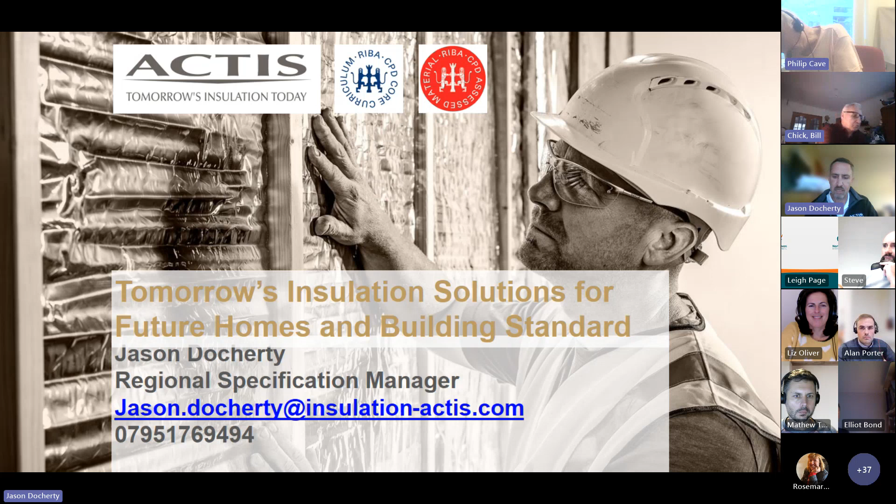If you don't know much about ACTIS, we're a multi-foil insulation manufacturer and we've been innovating new insulation solutions for over 40 years now. Multi-foils are quite massive in Europe, so the UK market is finally getting with the program, so to speak. We are a French-based company, so our current production sites, which we have four, are in the south of France. We are currently building a new production site as we speak. And hopefully the aim is by the end of 2025 that all of our production sites will be using totally renewable energy resources such as biomass and solar to produce our products.

So if you've got any customers that have green credentials, we have some really favourable data on this. We actually have zero waste production processes, and all of our products are 100% recyclable, and that's at the end of the building life or during production also. So if we have any offcuts of some of our products, we can chop it all back up and put it through the manufacturing process. We're really proud to announce that we've just received Cradle to Cradle certified products of our honeycomb insulation material, which I'll cover a bit later in the presentation.

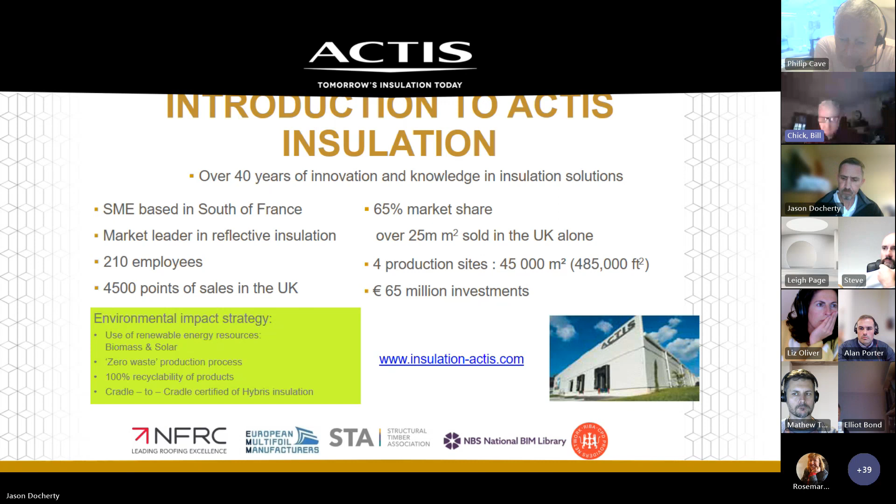We do try and give a full cradle to grave experience when you are specifying ACTIS, so we offer on-site guidance and support as well, and we have many tools on our website. If you haven't been onto our website, it might be worth having a look. We've also got our own YouTube channel where we present all of our installation videos. You just Google ACTIS insulation and all of our videos will pop up. We also have a simulator tool on our website where you can get an idea of how much material you'll need to gain the U-values that you require.

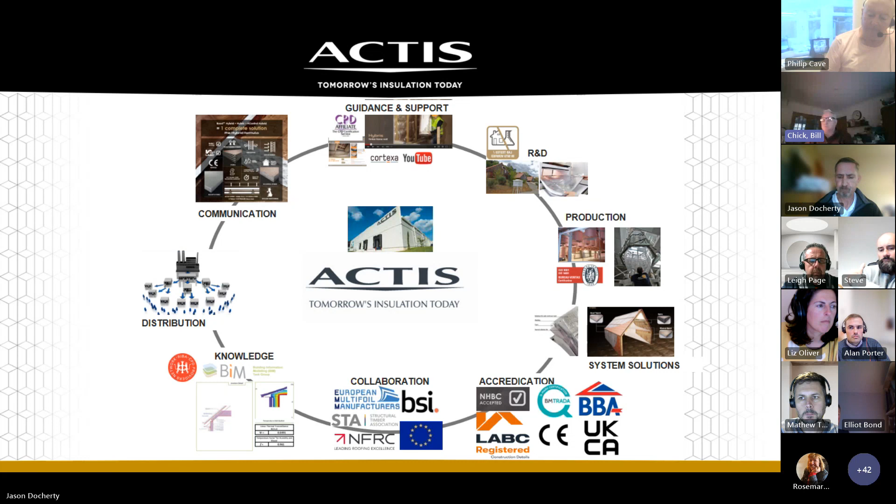All of our production processes are ISO accredited as well, so they're tested very rigorously, making sure that the products do what they say they should do. We offer a full tried and tested system from external to internal within a building's thermal envelope, so again, fully tested and accredited systems. We have independent accreditation and there's no issues with certification within the UK market. With regards to distribution, we do not sell our products to the end users directly. All of our products are sold via the builders merchants nationally and other distribution networks within the UK. And we're currently on a two-week lead time, so there's no issues with materials on the ground. So that's a little bit about ACTIS.

So moving into the main body of the presentation today with regards to Future Homes and Building Standards. Obviously the goal is to be building to net zero by 2050, which is going to be extremely hard to achieve if we continue with our previous building practices. So some of the objectives: what we need to do now is future-proof new homes to an extremely high standard. This not only means increasing the levels of insulation materials, but we need to think about the whole thermal envelope. We need to think about thermal bridging, especially at junctions of dwellings, and looking at airtightness of dwellings as well comes as a very important factor.

With regards to retrofit existing homes, we needed to do this to an extremely good standard. Now, you may have heard of the Zero Carbon Hub that has done many reports looking at a performance gap, especially with regards to retrofit. And they found that on many occasions there was up to 80% difference between the expected U values that were designed in a studio on CAD, etc., and what was actually found in a real life scenario. And this is a massive, massive issue for the industry as a whole.

And we've been talking about this for many years. Obviously, we need to reduce our carbon emissions, phase out fossil fuels and then decarbonise the electricity grid. If we continue to build with weak fabric solutions, our current capacity to provide electricity and a grid, etc., would not be able to support the current building we have going on within the UK. Some other things we now need to take into consideration are things like electric vehicles, especially with regards to new build or change of use, etc.

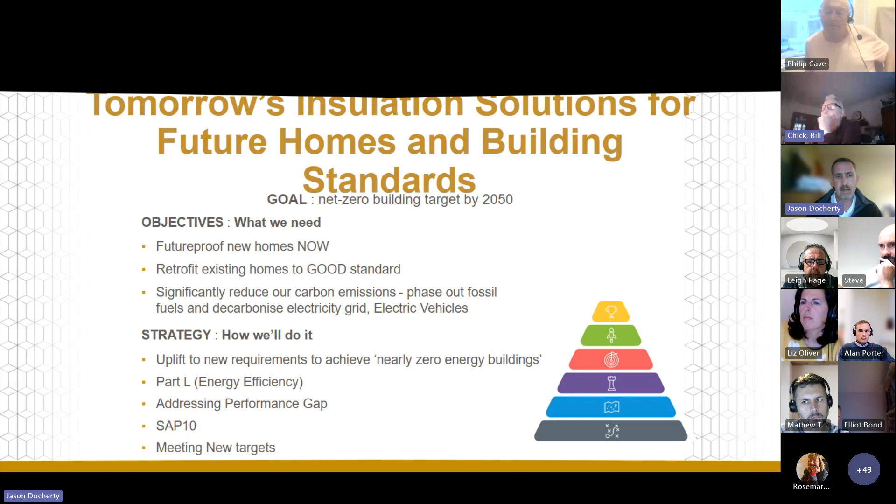Some of the strategies on how we'll achieve this. So obviously there's been an uplift to new requirements to achieve nearly zero energy buildings. We'll be looking at some of the Part L changes with regards to energy efficiency. We'll have a look at the ways we can address the performance gap with tried and tested systems. We'll be touching on some of the issues and new developments within SAP 10 and looking at some solutions on how we can meet these new targets.

So some of these new targets you may have seen on your SAP results. There's a new primary energy target for all buildings. There's a target CO2 emission rate for all buildings, also known as TER. There's also a target fabric energy efficiency rate for all dwellings, or TFEE.

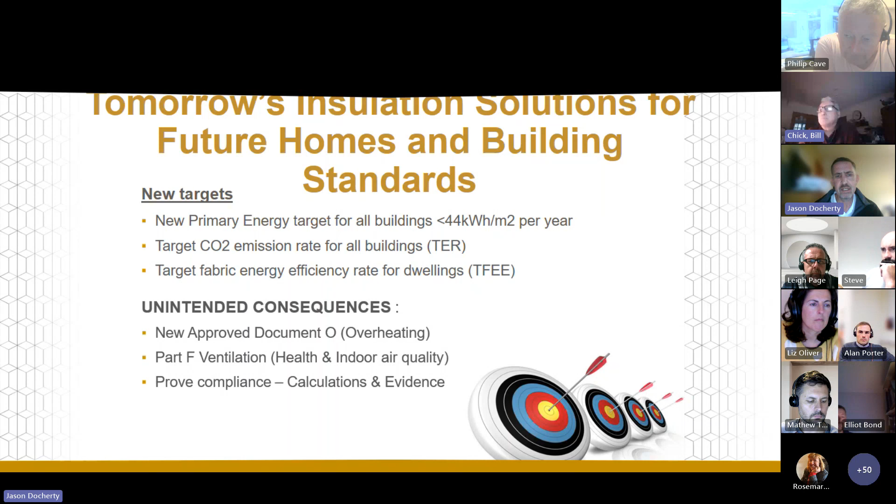However, if we're going to be insulating more, making buildings much more airtight, etc., there are some unintended consequences. So we'll be touching on the new Approved Document O with regards to overheating, and looking at Part F with regards to ventilation, health and indoor air quality. Some of the products that we specify can really affect this, and the VOCs they emit are vitally important. All ACTIS products are A+ rated, so very, very low emissions. We'll also be looking at some ways we can improve compliance and some of the calculations and evidence that are now required in the industry.

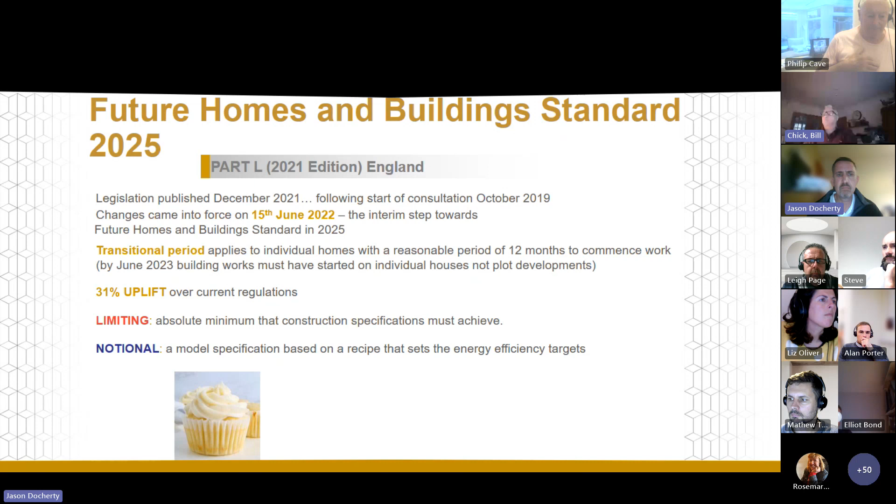So as we know, from last June, there was a 31% uplift over current Part L regulations. Now, when thinking about a new build, we need to think about this as a recipe. So we can work to two different kinds of figures. If we work to limiting figures, in a cake world or a recipe world, this would be a bog standard cupcake. So this is the absolute minimum that the construction specifications must achieve. However, we can then work towards notional figures, which is a model specification based on a recipe that sets the energy efficiency targets for that dwelling. So in a cupcake world, we could add sprinkles or chocolate icing.

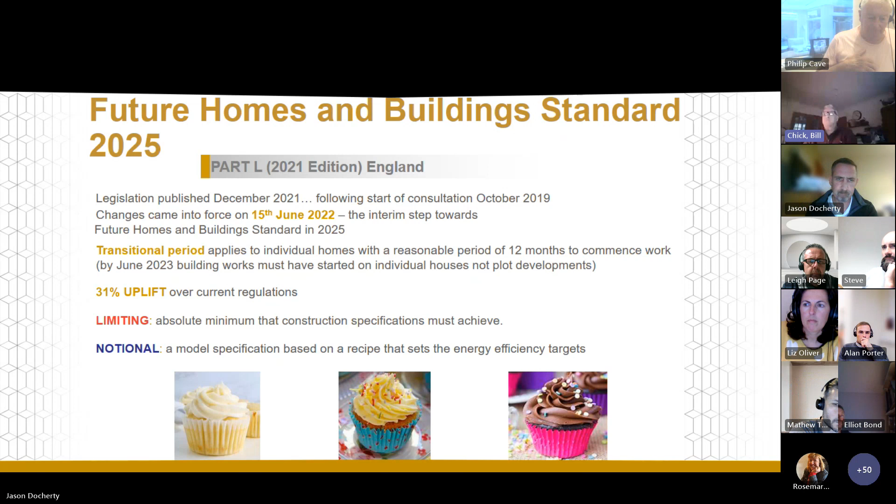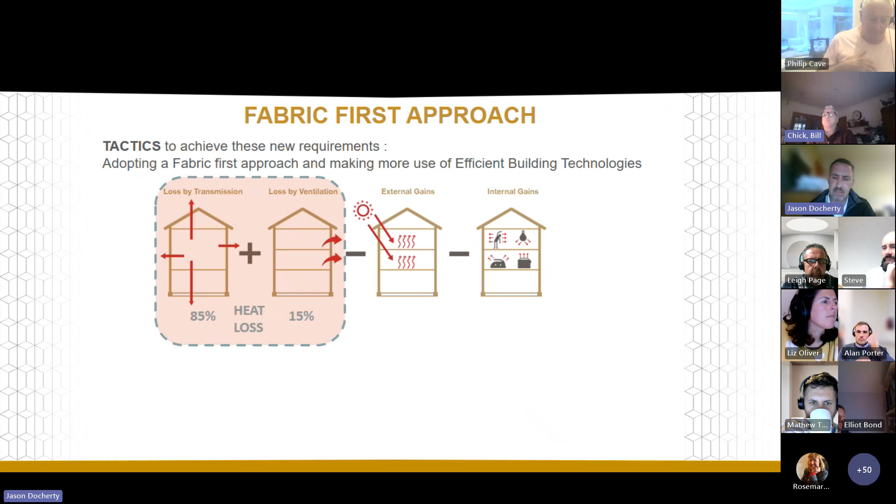Now, this is a basic SAP calculation and how we view a typical heat loss or thermal loss from a typical dwelling. So 85% of the thermal energy is expected to be lost via the building's fabric, be it the roof, the walls, or the floor, which is massive. And then on top of that, the additional loss from that dwelling would be via ventilation. So this could be poor fitment of insulation materials at the building's fabric, or it could be a ventilation strategy.

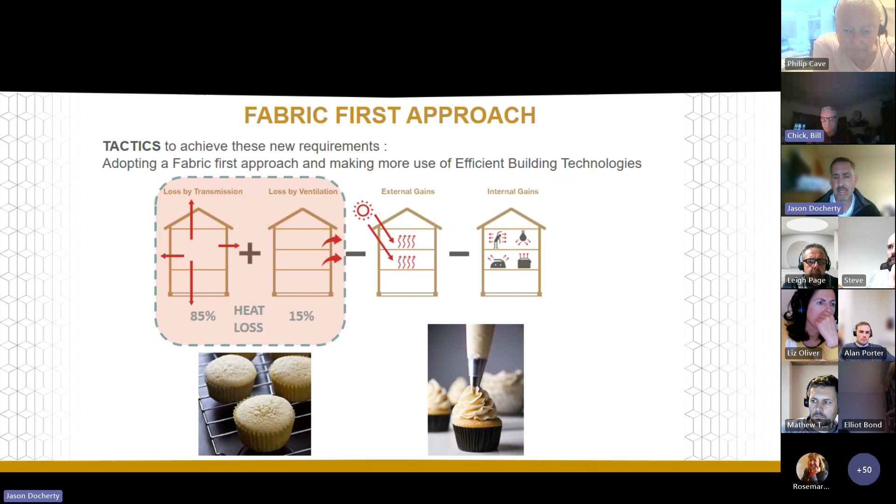Now, within this recipe, we would then take into consideration the external gains of the building. So how much glazing the building has, where it's situated in the country, if it's south facing, so on and so forth. Then we'll take into consideration the internal gains of that dwelling. So the amount of people expected to occupy the dwelling and the kind of lighting and heating systems the dwelling is expected to be using.

So you may have heard this phrase: we need to build tight, ventilate right, and bridge the performance gap with a fabric first approach. So what do we mean by fabric? Well, there's usually three elements we take into consideration. The first element that I'm usually asked for is the U value of an individual element of the dwelling. Then the second and third things we need to take into consideration, as I previously mentioned, are the thermal bridging and the air tightness of the element.

So here you can see a typical dwelling with a strong fabric solution, and it's retaining most of its thermal energy, and it's emitting less CO2. It's also impacted less greatly by external factors. Therefore, we could apply less renewable energy generation, saving money, and it would cost a lot less to run this type of dwelling. And looking at the energy bills we're currently facing today, this is vitally important.

If we continue to work with weak fabric solutions on dwellings, it's the exact opposite: increased CO2 emissions, increased thermal loss, and then we would have to offset that by more renewable energy generation, and it would cost a lot more to run this type of dwelling.

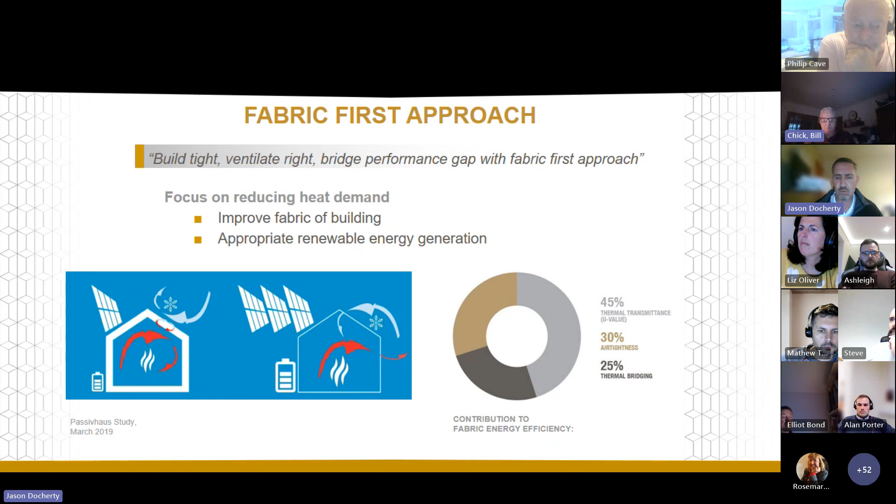So U values are vitally important, as we all know. So this is one of our typical U values for a timber frame wall. This is using our three-part system, using our insulated breather membrane on the outside in the cavity there, and then we use our honeycomb insulation in between this stud, and then we use our insulated VCL on the internal face. And this gains us a very favourable U value of 0.14.

Now, obviously, U values is the thermal transmittance value of a specific thermal element, always expressed from going from warm to cold. And these are expressed in the value of watts per metre squared Kelvin. Now, we have to follow specific conventions, etc., and protocols when running U value calculations. And some of these conventions have now been tweaked and updated in line with the new Part L regulations, and one of the main ones being BR 443.

Also, it's vitally important we think about condensation, because we can sometimes be doing more harm than good. Now, all of our calculations come with a condensation risk analysis and a dew point calculation. And we run our condensation risk in line with BS 5250 and the Glaser method.

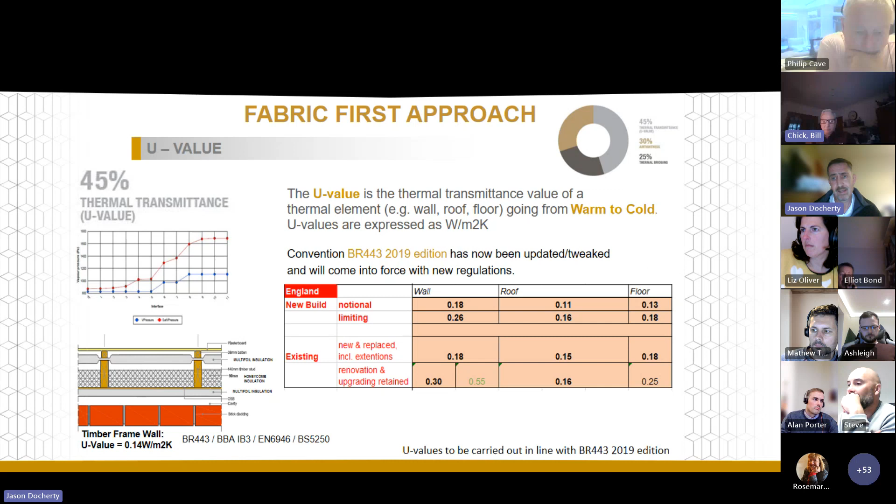Existing, however, is split into two. So the first section is new replaced, including extensions. So walls must achieve 0.18. Roofs must now achieve 0.15 and floors must now achieve 0.18. Renovation, upgrade and retained, we've got slightly more wiggle room, so to speak. So walls must still achieve 0.30. Generally, I'm asked for a 0.28 in that scenario. Roofs now must achieve 0.16 and floors must achieve 0.25.

Now, the new conventions obviously do clarify on how we now need to run calculations. Now, if you've not specified multifoil insulation materials before, they do react slightly differently to traditional insulation. So here you can see one of our typical solutions for a roof, and you'll see the insulated breather membrane on top of the rafter. Now, this membrane is actually 35mm thick here, as you can see. But when compressed between the batten and the top of the rafter, the actual multifoil will actually puff and pillow.

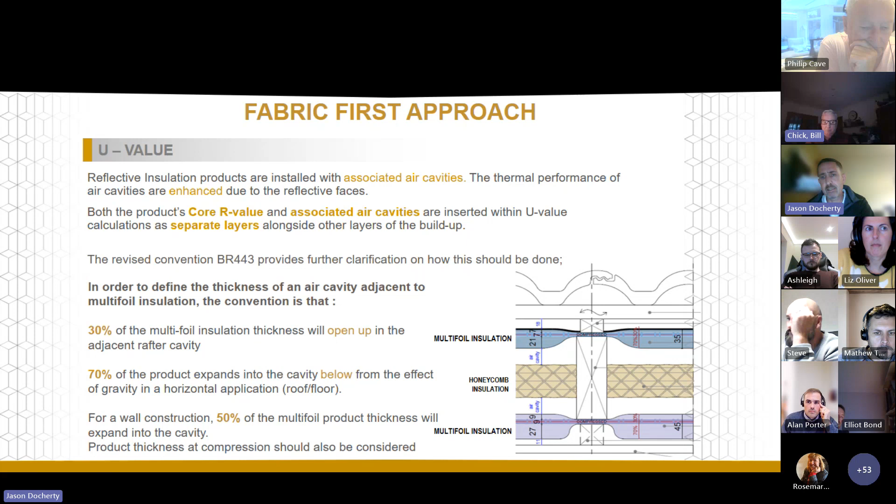So this convention is known as a 70-30 split. So 7mm of this 35mm will puff up into the counter batten zone, 7mm will compress, and 21mm will drape. Now, we have to take this into consideration when we're looking at the core R value of the product and its associated air cavities. Now, these layers are inserted within the U value calculation as separate layers alongside the other layers of the build-up.

With our insulated vapor control layer, the foil at the bottom of this drawing, the total thickness of this product is 45mm thick. Again, when compressed, 9mm will puff up into the rafter zone itself, 9mm will compress, and 27mm will drape. So we need to ensure we're taking this into account. If we don't, this will then add to the performance gap because the resistances of the air cavities would be incorrect.

Now, within a wall scenario, multifoils react slightly differently to under direct gravity. So it's a 50-50 split. So if we took our insulated vapor control layer, for instance, 18mm of that insulation would puff into the stud, 9mm will still compress, but 18mm will puff outwards. Like traditional insulation materials, we don't generally fully fill our actual elements with our products because the low emissivity cavities can enhance our products for free.

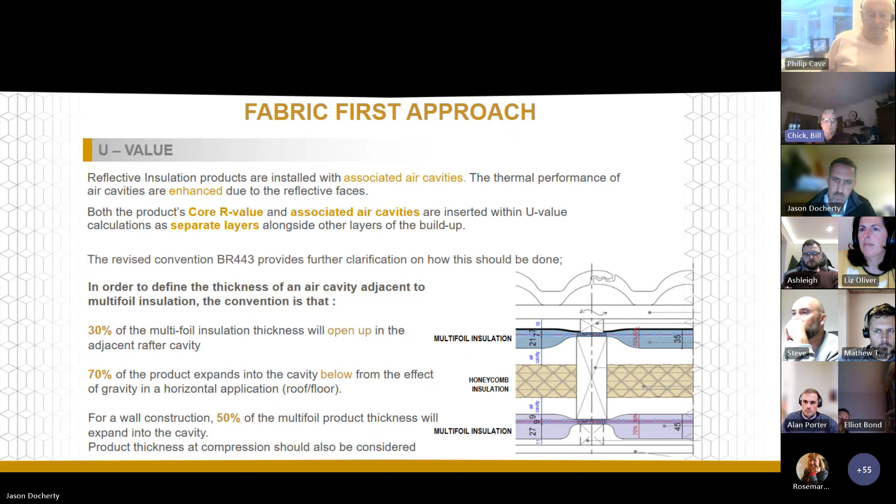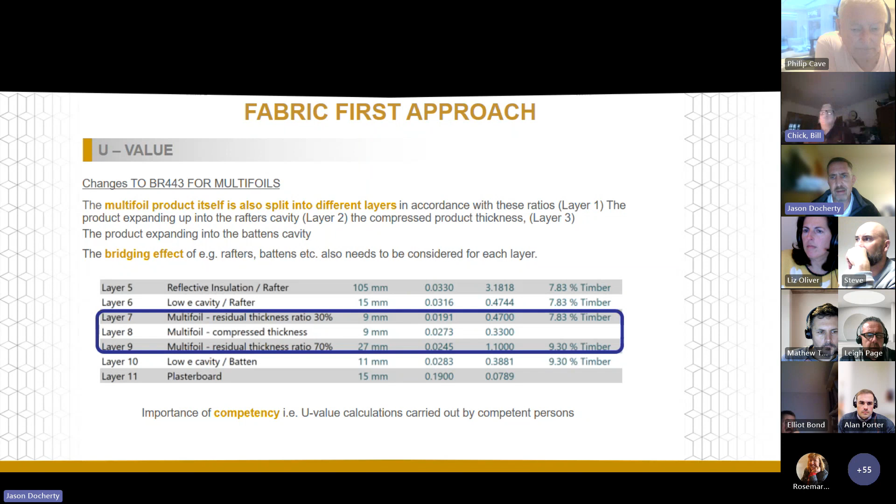So looking how this is clarified within a U value calculation. So this is our insulated vapor control layer. So layer 7 is obviously the puff up of the material, 9mm, and you also notice it is also bridged by the element it's puffing up into. So this is the rafter zone at 600 centers. Then you'll see the compressed layer, layer 8, and then the layer that drapes, layer 9. So it's 27mm, and that's draping into the counterbattens before plasterboard.

So it's vitally important then when running calculations that the person is competent and understands how the products work.

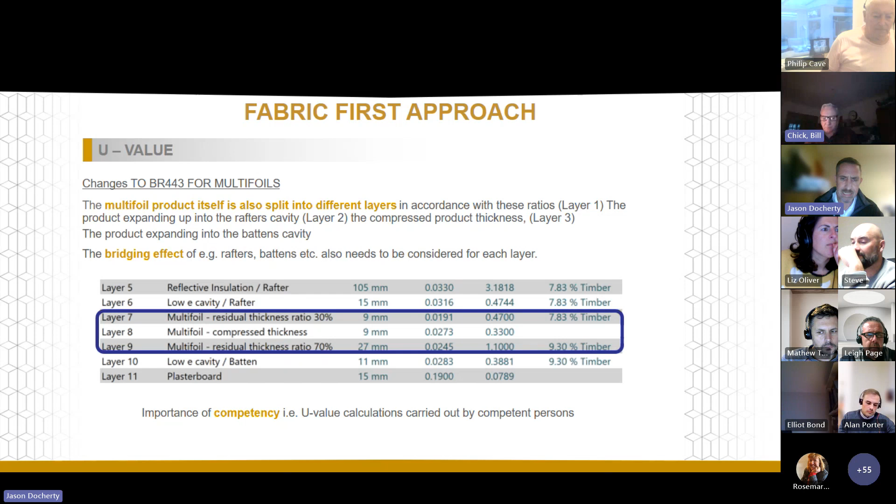Now moving on to air tightness. Now this is obviously the measure of air leakage of a building through the gaps, cracks and holes in the building's fabric. One of the main changes is that air tightness testing is required on all dwellings, including large developments. So testing of house types only is no longer allowed, and that is a major change for large developers.

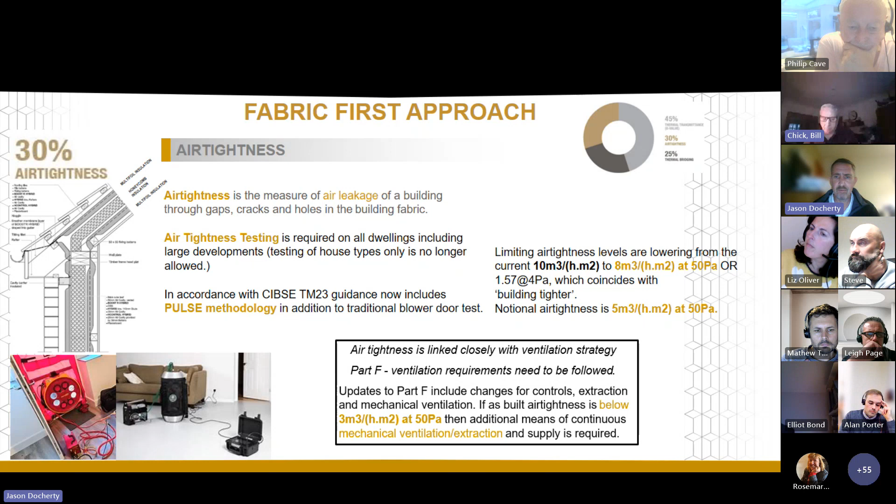Now, air tightness is linked closely with a ventilation strategy, and this is where we need to take into consideration Part F. So if we build tighter than the level of 3, we may need to introduce mechanical ventilation. I've found this already within cityscapes where we haven't got a natural ventilation strategy.

Now, with regards to thermal bridging, multifoil insulation materials have some major advantages, especially at junctions of buildings, because they're extremely flexible and provide a continuous insulation, be it on the outside or on the inside. So a thermal bridge is where a penetration through the insulation layer occurs and then heat is transferred through a non-insulating material, such as timber. And this generally happens at construction details. So for the products that we're specifying, the manufacturers should be able to provide you with construction details to ensure this doesn't happen. Now, this is defined as a linear thermal bridge, especially at junctions.

Now, the second drawing or photo here, you can see a typical wall solution with insulation in between studs, and you can see the amount of thermal leakage through that without a continuous insulation material. Now, this heat loss at a linear thermal bridge is quantified as psi values. Now, all these psi values in our recipe, together divided by the sum of exposed elements in a SAP calculation, make up the overall heat loss of the building through linear thermal bridging.

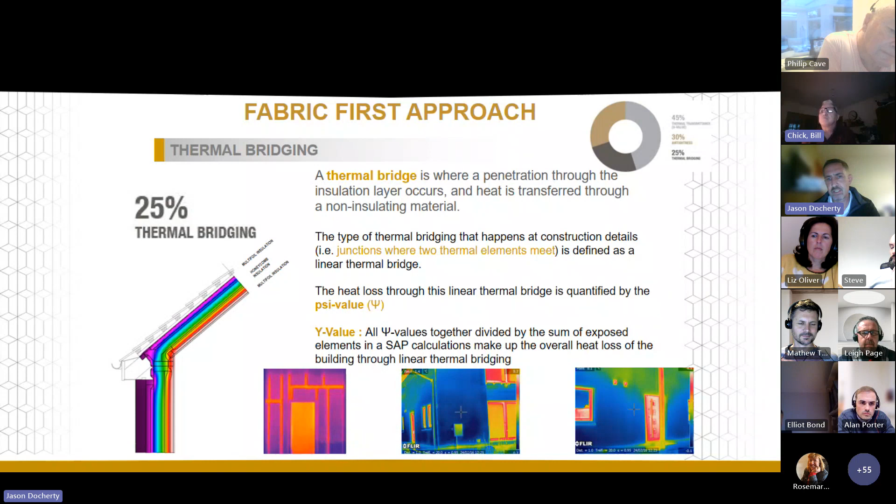So until now, heat losses owing to junctions in the construction have been offset by the ACD scheme, or accredited construction details. However, these ACDs have been considered to be inaccurate and not fit for purpose based on current building practices. So they've actually been removed and can no longer be used. However, psi values can be used if modelled by a competent person. ACTIS can provide this service for you. We do have software to provide most junctions of dwellings. However, some junctions we cannot perform, but we do work closely with an independent agency. There are also non-government body databases that you can take this information from.

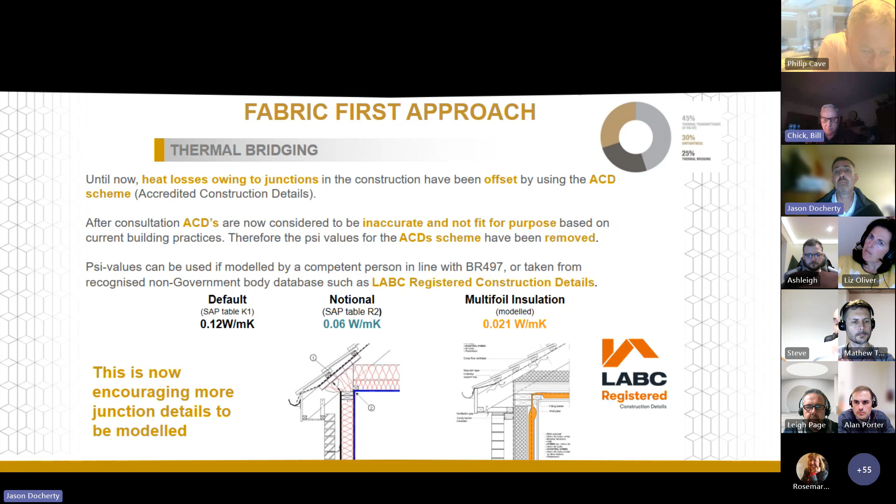So if the SAP assessor isn't aware of how a junction is going to perform, they would have to apply a default figure to this. Now, if many default figures were used in this recipe, so to speak, or calculation, then it will be extremely hard to pass your SAP fabric within the new SAP 10 world. You could apply notional values within the recipe, or you could come to someone like us where we could provide you with our modelled junctions, and you can see there's a vast improvement.

So table K1 values or default psi values can be mixed with known values. If this is not possible, then the overall default Y of 0.20 must be applied. However, this default has been worsened quite dramatically from the previous default of 0.15. Notional values sit at 0.05, but reflective insulation can actually achieve as low as 0.03. So again, major advantages.

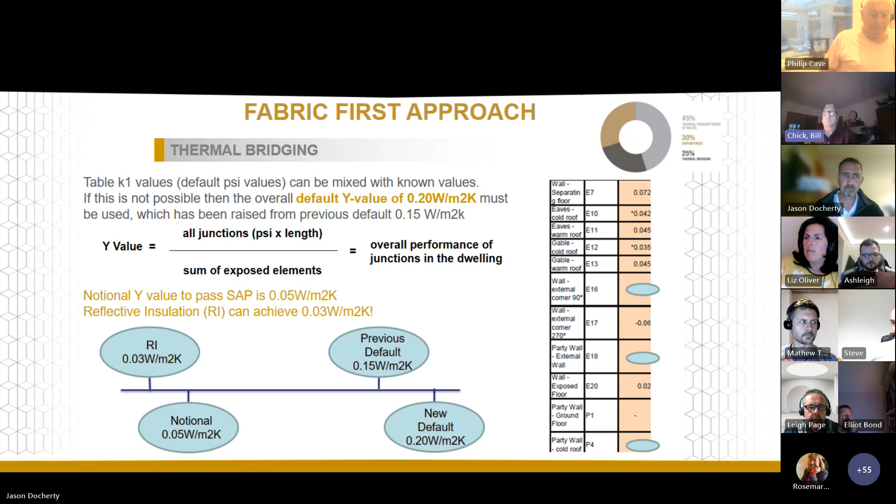Now, fabric first approach. It's all well manufacturers testing in blue sky laboratory conditions, but it's vitally important that the products that we specify actually do work in real life scenarios. So we've actually had some independent tests done using our products and solutions. The first test I'm showing you here was done by the Glasgow Caledonian University. This was a wall setup, and in the laboratory conditions, this wall was expected to achieve a U value of 0.28. After testing, this wall setup was actually achieving on average a U value of 0.22. So we're really confident that the products do what they say they do.

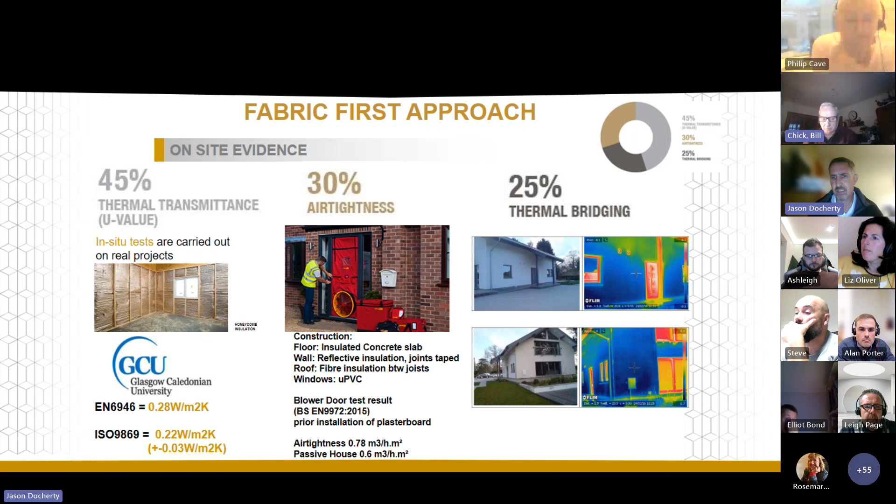We've also had some independent blower door test results, and this one was actually prior to installation of the plasterboard. Now, passive house usually comes out around 0.6. This air tightness test actually received a value of 0.78. And again, back to our independent thermal imagery, again, the two-part system doing what it says it does.

Now moving on to on-site evidence. Now you are probably aware there's much more evidence we now need to provide, and some of it is to be provided at design and as-built stage. One of these reports is a new BREL, and we obviously need the addition of geotagged photographic evidence of build quality. Obviously, we need to focus on the continuity of insulation, especially at junctions, so construction details should be available for all the junctions within the dwelling.

On-site audits would obviously continue to be carried out, and this is generally before elements are concealed, and again, photographs of these are to be taken as per the guidance list. All of this evidence and reports alongside the EPC are then provided to the client, building control, and more importantly, signed off by the developer.

Another thing which has been introduced is a new home user guide. We're introducing many new different technologies into our new dwellings, and many people may not have used these. So this guide is going to be vitally important on showing them how to use their new types of systems, especially like ventilation, hot water, etc. And obviously ways to avoid overheating.

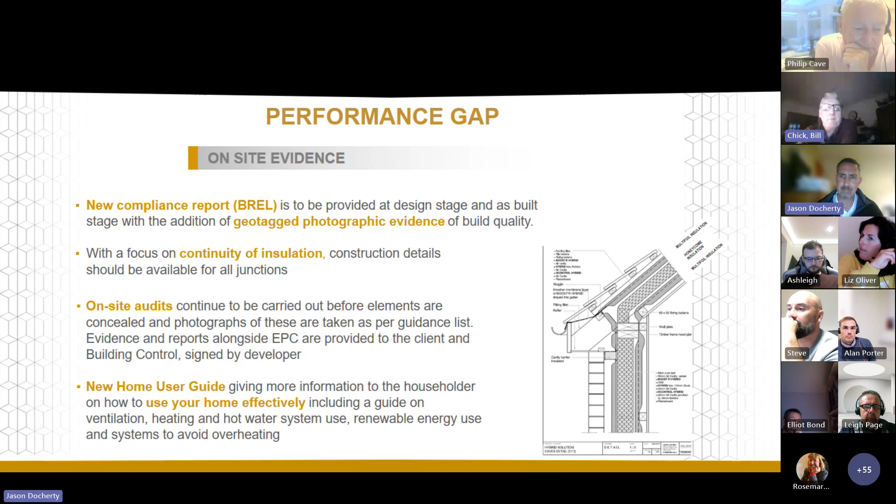So these not only assure as-built energy performance, but they also provide products developed to fit a specific system. They also give attention to detail on site. Products that we specify should be easy to install and not so reliant on specialists. How many times have we gone to site and seen rigid materials stuck in with filler foam, etc.? We need to focus on continuous insulation and airtight layers, and multi-foils have a massive advantage with this.

Again, with regards to condensation, we should be providing integrated service voids, and these should remain undisturbed by follow-up trades. Again, I've had issues in the past where we've had VCLs installed, sealed tight, etc., and installed correctly, and then a follow-up trade has put a cable or pipe through it and not sealed it and caused condensation.

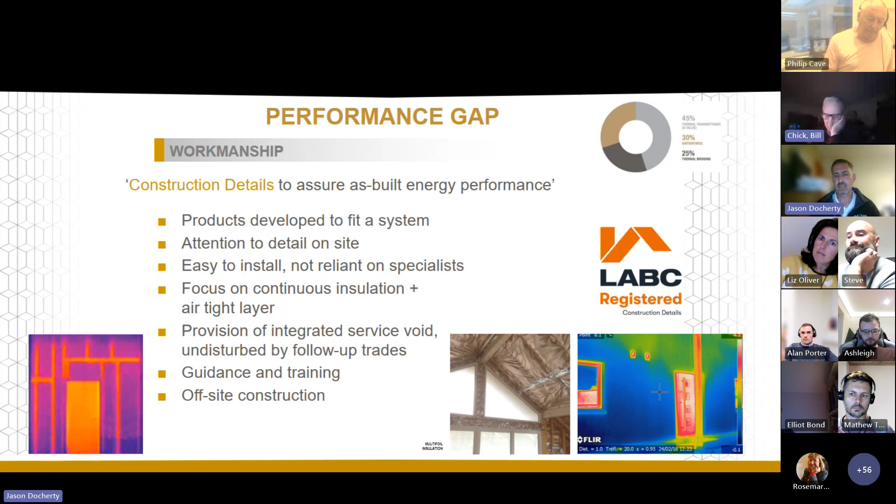Now looking at new Approved Document O in regards to overheating, and this is applicable to new dwellings only. And this looks at the need to limit unwanted solar gains, especially in summer, and provide adequate means of removing excess heat from indoors. Now, generally, we can do this via passive means, especially in countryside and suburbia. However, this may not be viable within a cityscape scenario. We would generally try and do this via openings, shading, and a ventilation strategy. However, if this can't be met, we may need to introduce air conditioning.

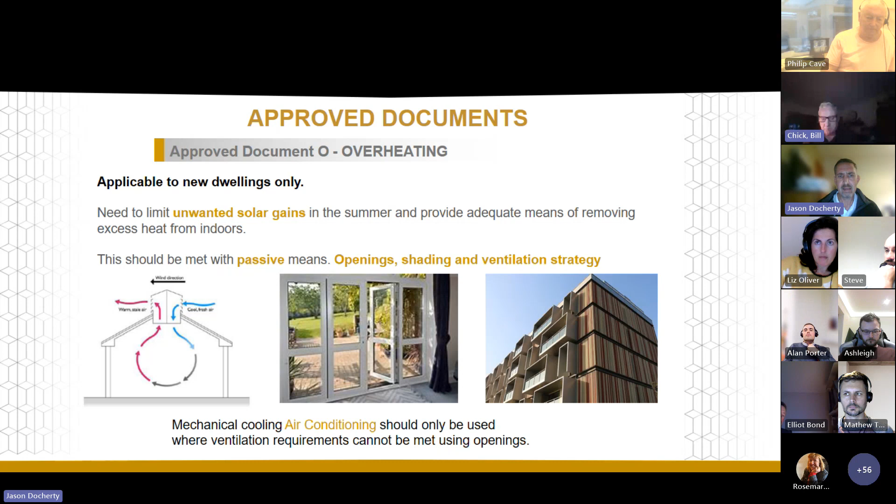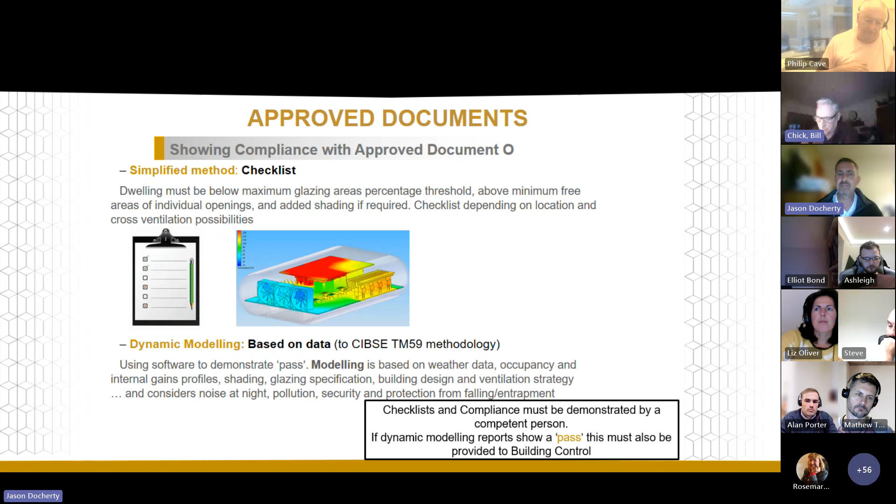Then there's another type of testing called dynamic modelling, and this is usually used in cityscape, and this is using software to demonstrate a pass. Now, this kind of modelling is based on much more data, and this includes weather data, occupancy, and some of the things I mentioned, like internal gains, so on and so forth. Now, these checklists and compliance must be demonstrated by a competent person. And if the dynamic modelling report shows a pass, this must be provided to building control. Just to note, the simplified method is not suitable for buildings with more than one residential unit which use a communal heating or hot water system.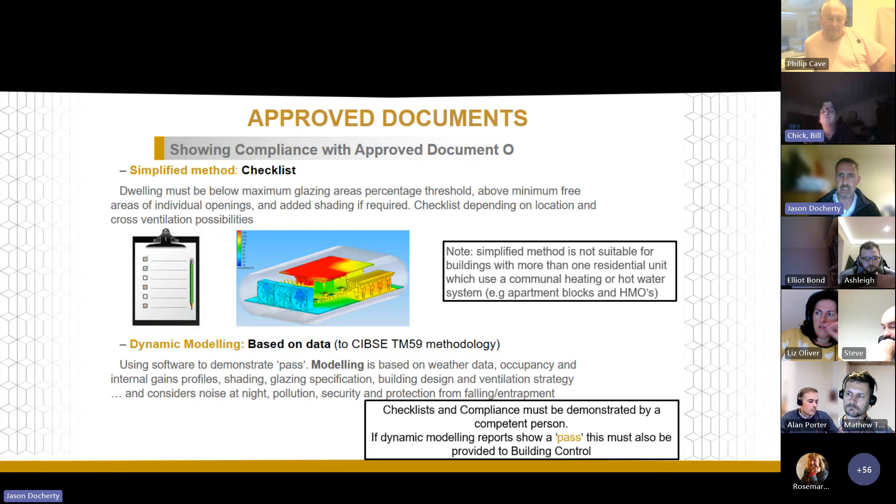Now, more data is required when this modelling occurs, and this modelling includes the calculation of thermal mass, which is the capacity of the construction to absorb, store, and release heat. This is also influenced by phase change of build-ups. So we then need to calculate the capacity of the materials in the actual construction and their ability to store and release heat at a later time. The more time delay, the better. So to calculate thermal mass, kappa values are required, and ACTIS can provide these, and these usually come along with your U-value calculation.

Now, kappa values are calculated using the density and heat capacity of the individual components in the build-up of the element concerned. So, for instance, if we had a wall with a block, and we specified a specific block within this calculation, and it also has a specific density and heat capacity, and then the end user went and changed it for a different type of block, this would alter the kappa value. So again, we must stick to the specification.

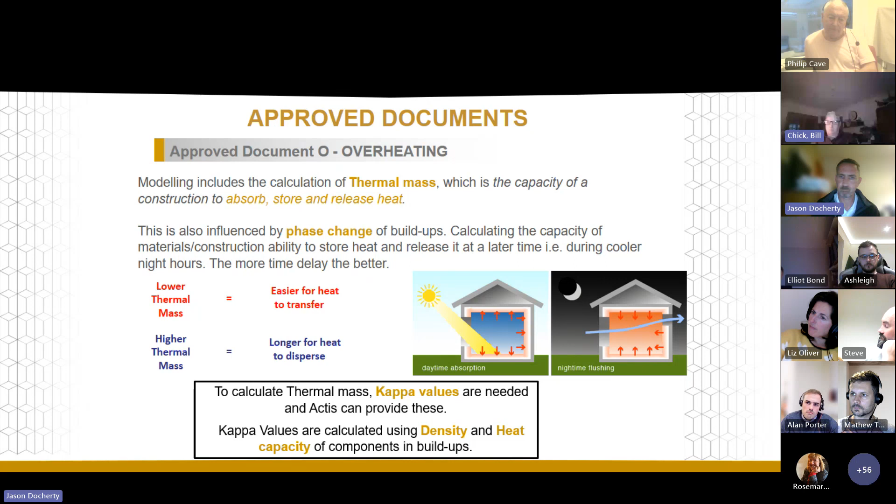Now, some of the changes within SAP 10. As we all know, we are trying to abolish gas for heating new homes by 2025, which is going to be quite a challenge. So this is pushing the priority of reducing carbon footprint and incorporating renewable energies. To reflect this, many of the fuel types recognised in SAP have had their fuel prices, CO2 and primary energy factors changed, the most significant being electricity related carbon emissions. This just reflects the increased influence of renewable energy technologies producing electricity for the national grid.

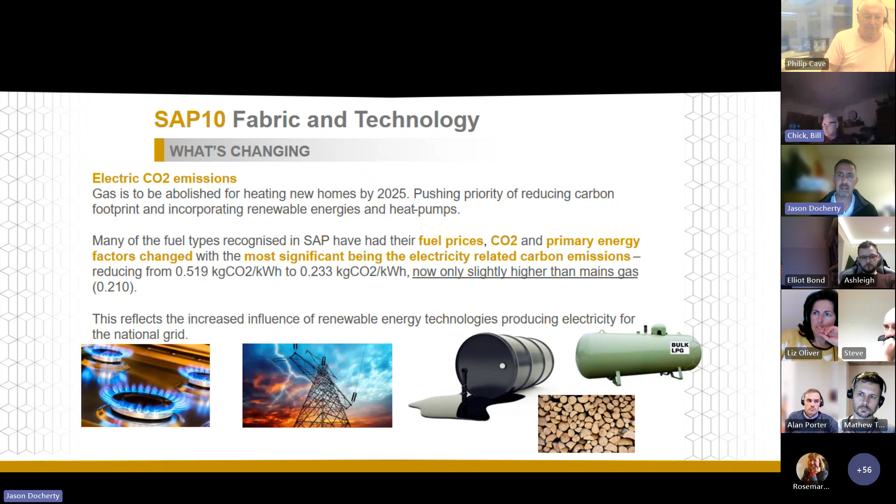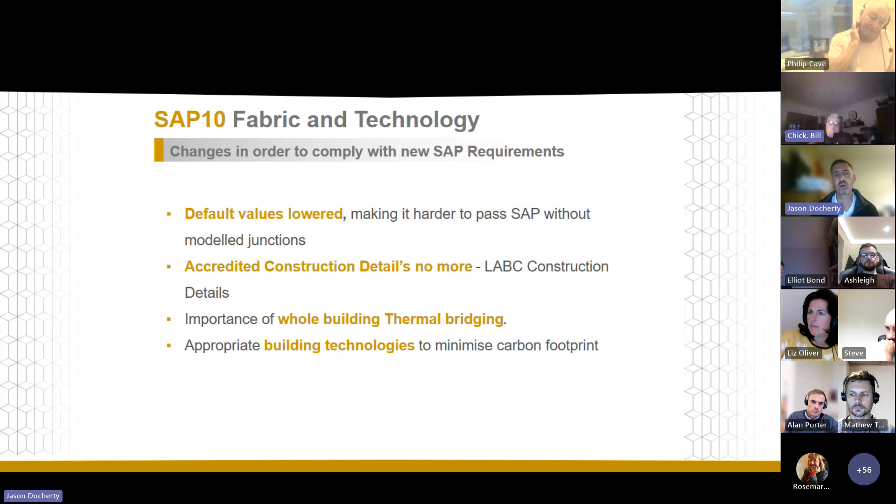Some of the main changes to take away from SAP: default values are lowered, so it's going to be extremely hard to pass SAP without the correct model junctions. ACDs are no more, so use sites like the LABC construction detail site. It's now more vitally important that we take into consideration the whole building's thermal bridging and then apply appropriate building technologies to minimise carbon footprint. However, to achieve our goal of net zero by 2050, we all need to work together and have a collective strategy for meeting all these new targets.

So Part L, 31% uplift on U values for all dwellings. We must adopt a fabric first approach. We need to reduce the impact of linear thermal bridging, especially at junctions, so construction details are vitally important, and then improve air tightness with continuous insulation at these junctions. However, we then need to address things like overheating, ventilation strategies and air quality. Model junctions are extremely important, so if these would help you, please do come and knock on our door. We might be able to assist.

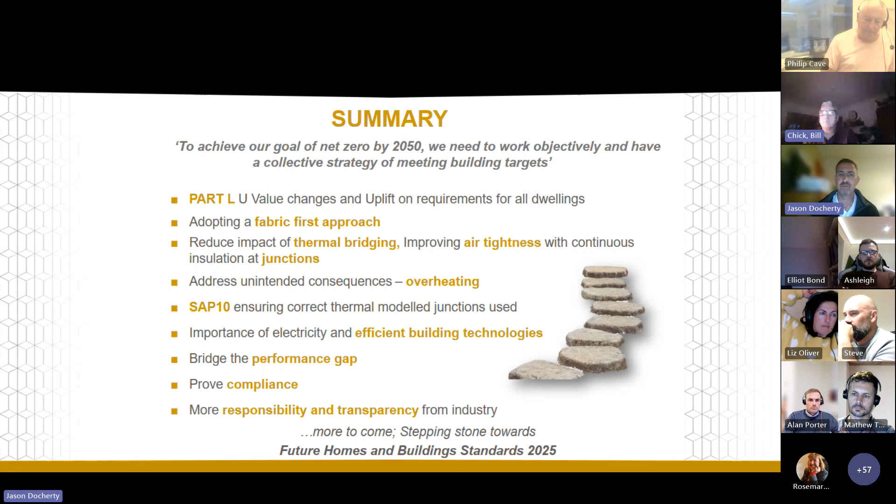And then applying the efficient building technologies. We certainly do need to bridge the performance gaps from what is designed to what is actually built in real life. So again, manufacturer support and guidance on the installation of materials is vitally important. And we now need to prove compliance. There's a lot more proof that we now need to supply. I believe this is making the industry more responsible and transparent. However, these are just some of the stepping stones towards the Future Homes and Buildings Standards. So there's much more to come.

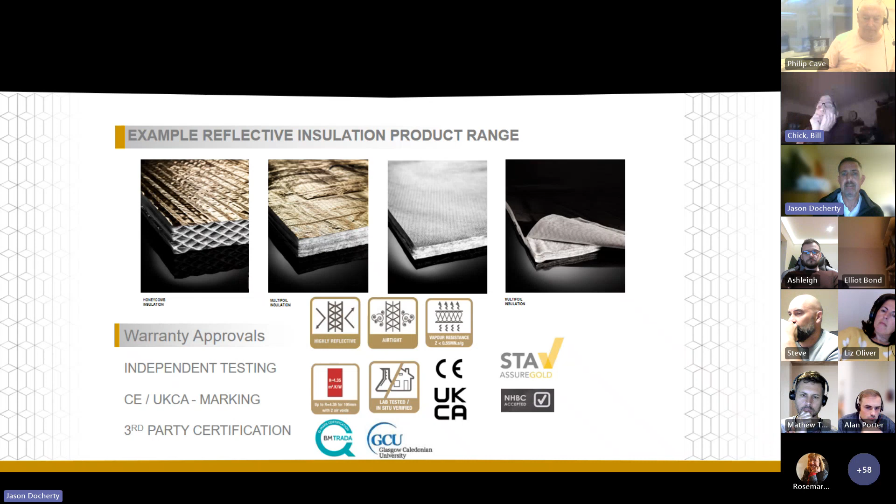Now moving into our product range, if you're not aware of it. We've got 4 products in this range, and it's called the hybrid range. We have our honeycomb insulation, which is a great alternative to traditional insulation materials, and this is inserted between rafter, stud, joist, or anywhere it can be suspended. Then we have our multifoils. We have a multifoil with a vapour control layer function, which is always installed on the warm side of construction. And then we have insulated breather membranes, which go externally. The silver one here is for walls, and the black one is applied to the top of roofs. All of these products are independently laboratory tested and in situ verified.

We offer a full system solution from external to internal, as I previously mentioned. However, we can mix and match our insulation solutions with traditional insulation. So as long as one of our products is in the specification, we're happy to provide you with a U value calculation.

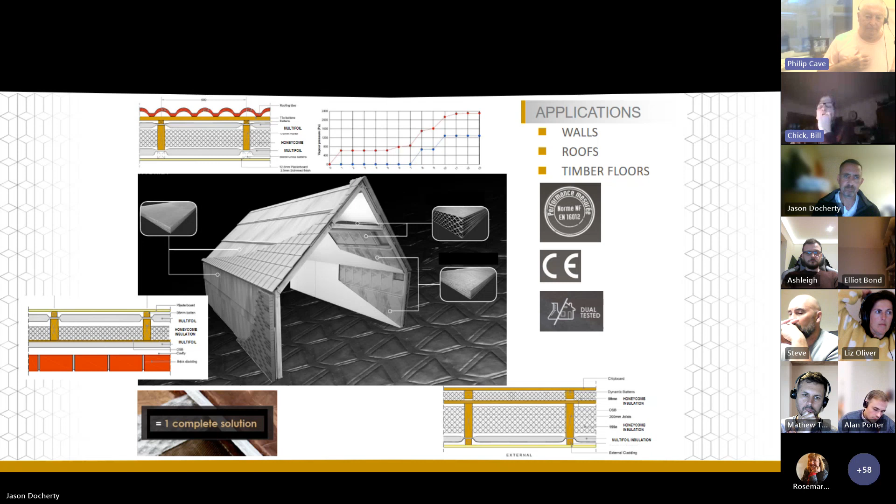So this is our honeycomb product. It's called Hybris, and it's just received cradle to cradle certification. This is a friction fit product, so we overcut it 5 to 10 mil. When we measure our centres, we then mark our bale. If you've got 400 centres, you'll be cutting this bale approximately into 3, and if you've got 600 centres, approximately in half. The beauty of this product is you get no dust, mess or fibre whatsoever, so it's a lot cleaner for the user. And it can be a lot quicker because you can get up to 4 panels with one cut, reducing labour costs.

When you've cut through your panel, you can take off the outer wrapper, and it comes in a concertina like this. Once you've got this concertina, you extend it, and it extends to approximately 1.2 metres in length. Once extended, you'll notice all of the cells, or simplexes as we call them, open up. We then flip it over and extend it again. You will notice one side of all of our products is copper coloured and one side is silver coloured. This not only helps the installer ensure it goes in the correct way round, but the copper coloured side is a slightly thicker vapour control layer. This product comes from 50mm thick up to 185mm thick.

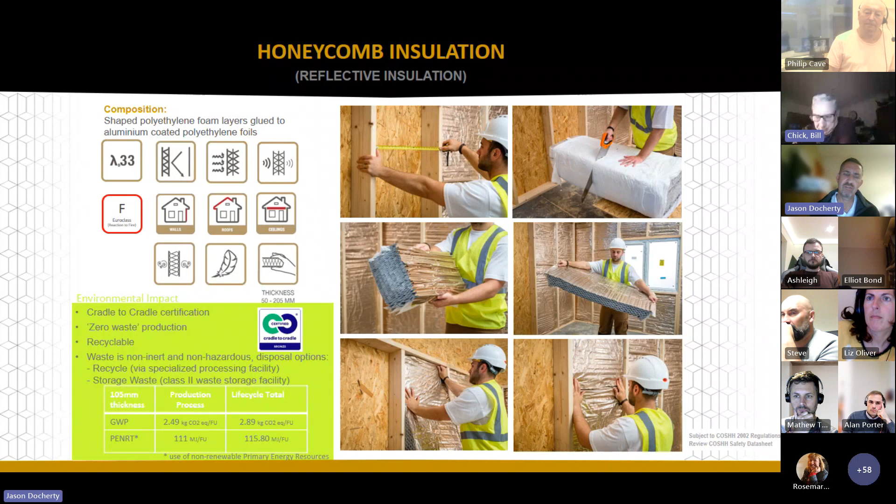Then moving on to our insulated vapour control layer. This obviously goes warm side of construction. So this is stapled directly to the front of the stud, rafter or joist. And as with all VCLs, it must be foil taped to ensure air tightness. We generally recommend 100mm foil tape. Then to provide an integrated service void, and obviously to allow the puffing and pillowing I mentioned, we generally use a 38mm counter batten before applying plasterboards.

Now multifoils can be a little tricky to cut, so we do recommend a cutter that we've developed which compresses all of the layers of this material together, and it has a blade which just glides through, which is especially helpful at junctions of the dwelling. This product is equivalent to approximately 40mm worth of rigid board with 2 associated air cavities.

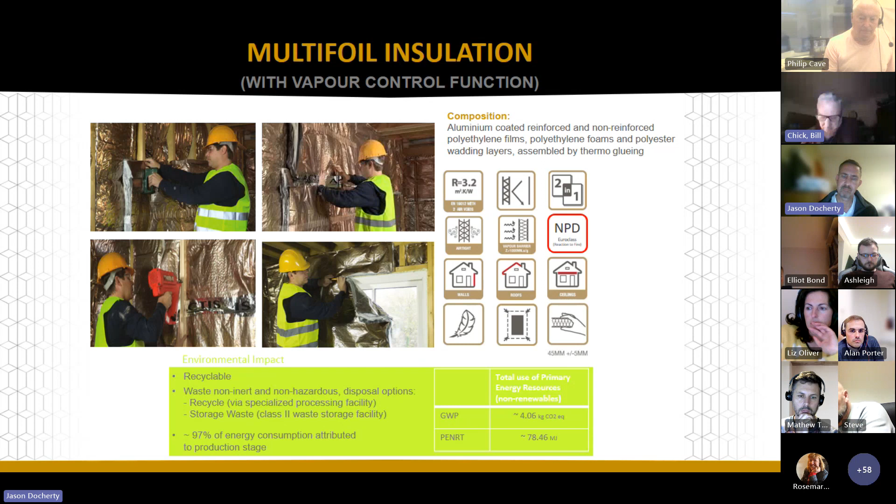This is our insulated breather membrane called Boost R Hybrid. Now this is a reflective breather membrane with additional added insulation material, and it's stapled directly to the outside of a timber frame wall, be it the OSB or ply. We must overlap this product to ensure water tightness, and then apply a specific foil tape which we supply called multi-adhesive tape, which is a lot stickier. Once it's taped and sealed, again using the cutter just to cut around your junctions, we then apply the appropriate battens before your cladding system goes on.

We can use this within a brick clad cavity, but we do need to ensure within that cavity zone, we now need to allow the thickness of the product, which is 35mm thick, along with a clear 50mm cavity to ensure we're complying. So basically what I'm saying is we need an 85mm cavity in total. This product is equivalent to having around 30mm worth of rigid board on the outside of your dwelling.

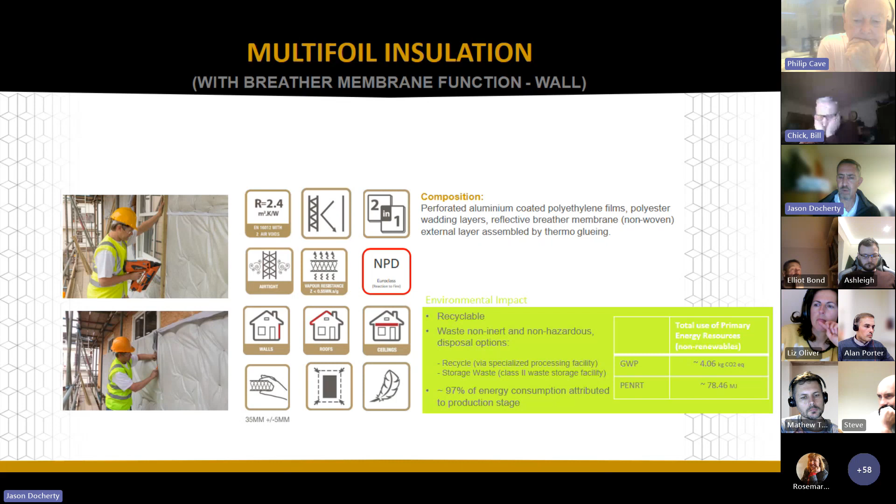Now moving to the roof insulated breather membrane. This is directly attached to the top of your rafters. Again, this product is 35mm thick, but in addition, this product has a built-in lap and tape. This just ensures the continuity of the air tightness of the actual membrane itself. Because of the puffing and pillowing, we do normally recommend a counter batten before applying tile battens. This just allows a clear passage for any water to disperse from the top of the membrane down the roof.

If this cannot be done with a counter batten, if you've got a semi-detached house or terrace housing, we can offer a draped solution using this product, but this is very reliant on the installer to drape sufficiently below the actual tile battens themselves. Again, this is equivalent to having approximately 30mm worth of rigid board above your roof.

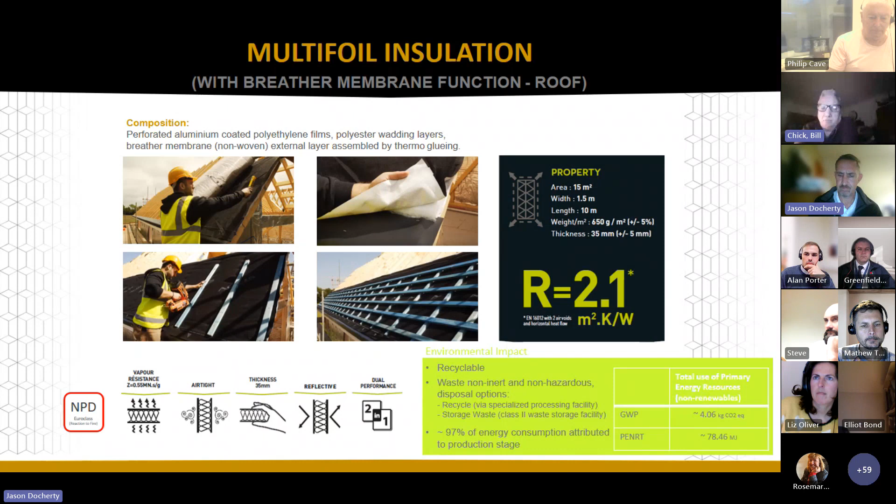I just wanted to touch on Part B because it's obviously vitally important. Now, most reflective insulation products are usually combustible, be it rigid or multifoil. However, internal fire resistance is achieved as a system with a non-combustible lining board, such as plasterboard. Compartmentation is achieved through the provision of fire stops, and the use of appropriate cavity barriers at relevant locations is vitally important. We allow for an appropriate safety cavity in the vicinity of heat sources such as flues, etc. And we do not carry insulation of this type over compartment zones.

Again, we cannot use these kinds of materials on and throughout the external wall of a relevant building over 18 metres in height and 11 metres in height for residential purpose group buildings. Obviously, it's vitally important we follow the Approved Documents B, volumes 1 and 2, and Building Regulation 7. And we always follow the STA guidance for fire safety, specifically during construction of timber frame, and then follow the specific site requirements.

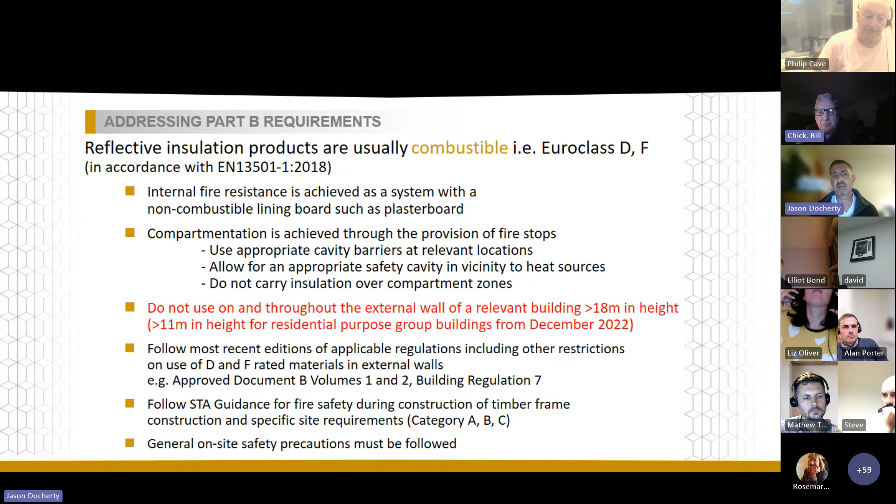On the back of this, obviously, we've done many fire tests, etc. If you'd be interested in our fire certification and test results, please do drop me a line. I'll be happy to provide this for you.

We've done all of our testing in association with Warrington Fire, which I'm sure you're all aware of and have heard of. So obviously Part B states a 30-minute fire resistance is required for domestic 2-storey buildings. Now we were advised to test this wall assembly under a load, and we tested it under a load of 75%, which is like having a small gathering on the first floor. And you may or may not know, studs will fail quicker when a load is applied. Now this just used our honeycomb material within a 140mm stud with a standard plasterboard, etc. And pleasingly, we've got a pass result of 38 minutes.

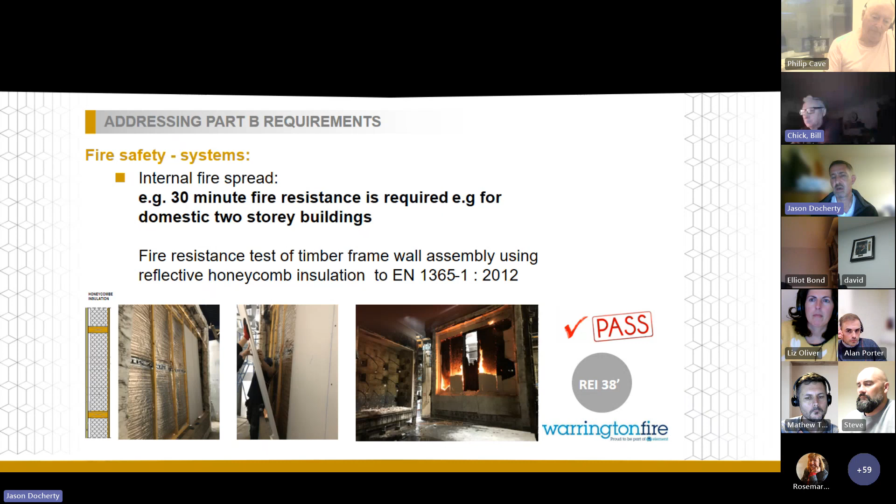This is just a snapshot of our simulator tool, which can be found on our website. Again, this is great to be used as a guide to see how much material you require to obtain the U value you need. But again, please do only use it as a guide. We do have to put certain parameters within this specification tool. So again, if you do need help with U value calculations, please use either the technical team or myself directly.

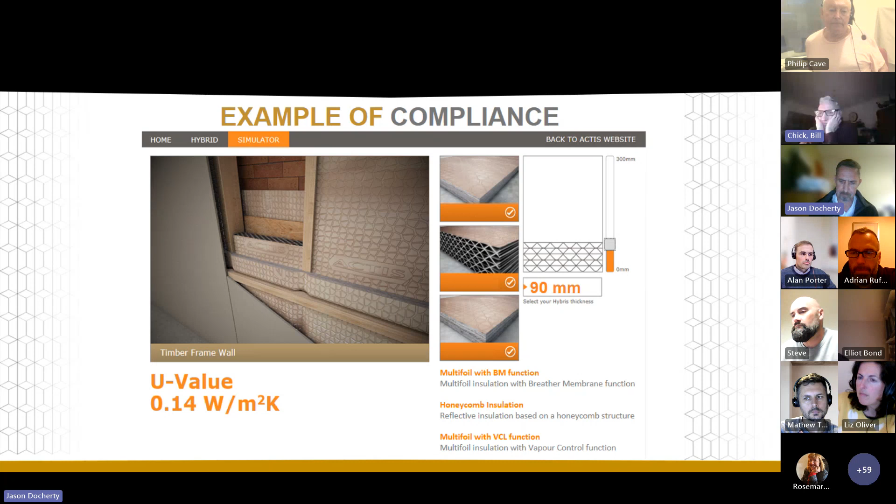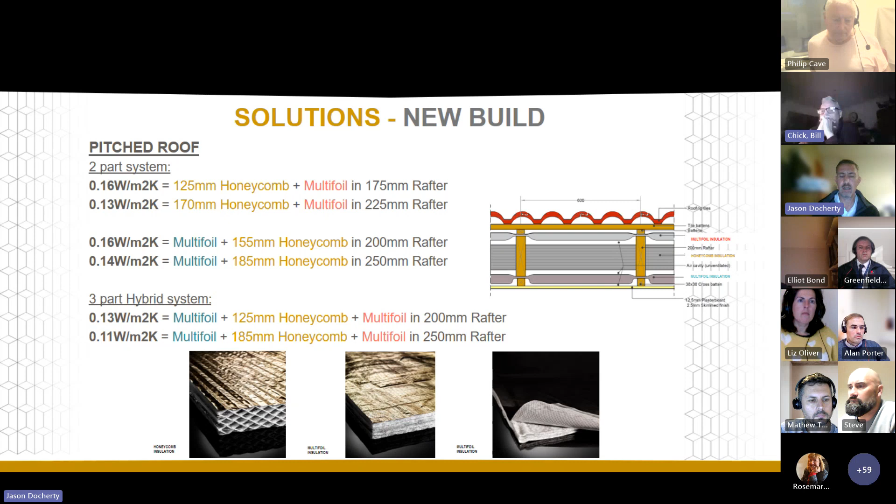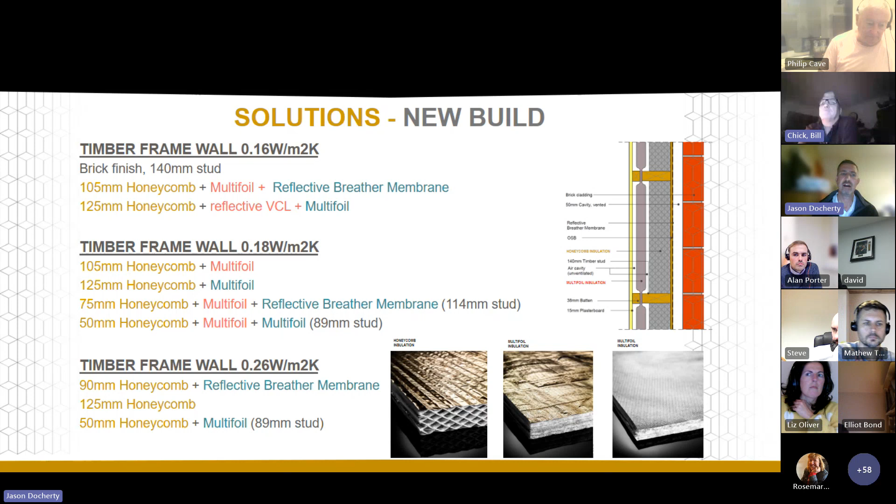Walls are a lot easier to obtain the current U value targets. So our general solution for most modular timber framers is the top one. Within a 140mm stud, we can use our 105mm honeycomb with our internal multifoil with a standard reflective breather membrane. To obtain 0.18, we can use a 2-part system with our 105mm honeycomb and our internal multifoil. If we're just looking at upgrading, we can actually get down to an 89mm stud using our insulated breather membrane with our 50mm honeycomb system. Just a note, new conservatories without thermal separation are now to be treated as new thermal elements, as I'm sure you're aware.

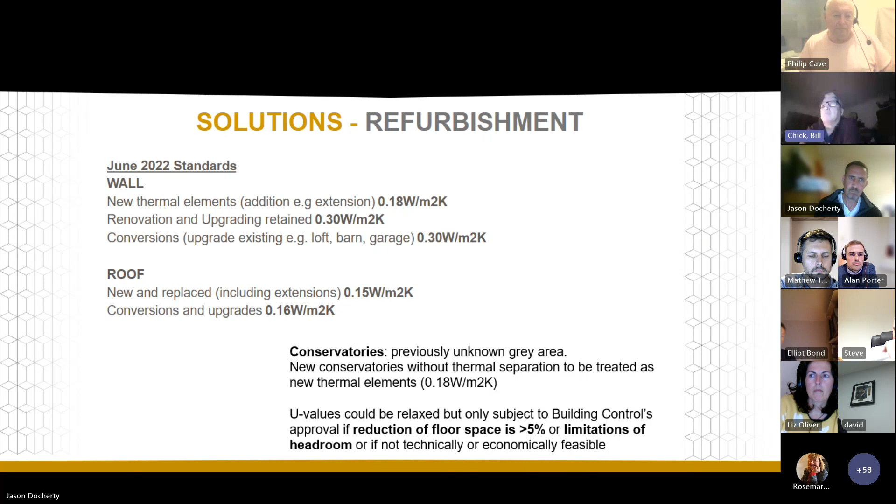Now looking at solid wall solutions. Now these can be a bit trickier. So generally as a rule of thumb, anything pre-1920, these walls are designed to breathe. So generally there's only 2 ways we can tackle this. The first way would be normally a vapor open solution, such as a sheep's wool or a wool, etc. Or alternatively, if we can ventilate a cavity, a minimum of 25mm, between the timber studs and our vapor close solution, then we can potentially offer a solution. But any newer solid wall, we can offer a solution. So to obtain a 0.28, an upgrade in a non-absorbent wall, our 105mm honeycomb can get us there.

Pitched roofs, we're finding it more difficult to obtain the new regulations, so 0.16 and 0.15. Generally, we were finding that these rafters are usually set at 100mm at 400 centres, and usually with a sarking felt. Now, we have introduced a new product called AOLIS to the market in that scenario, where we've done a more scientific study with regards to condensation risk analysis. If you need more detail on that, you'll find that on our website. It's called AOLIS HC. But these are some of the current solutions we can offer with our hybrid range. So 0.16, 140 honeycomb with our internal vapor control layer. Or 0.15, we could do 155mm honeycomb with our 200mm rafter. Obviously, we would have more solutions with our 3-part systems within a smaller rafter depth, so if the roof covering's coming off.

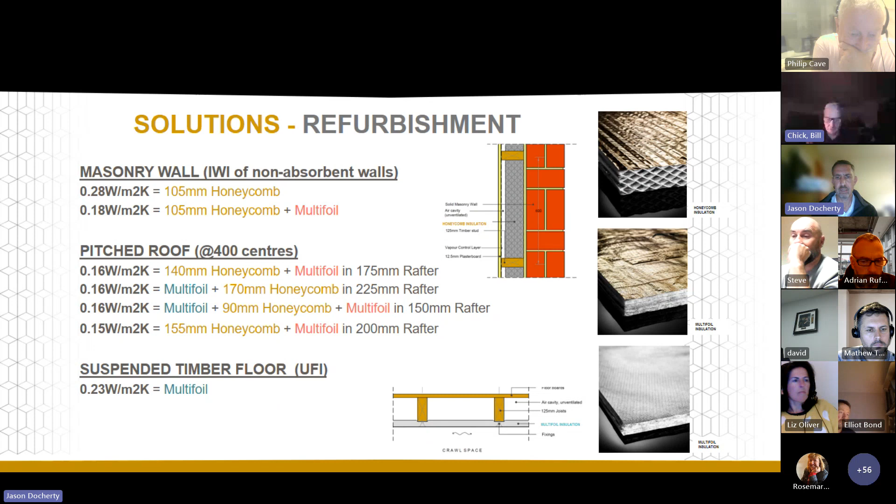Now, just moving into case studies. This is a new build, one of our clients, and this has achieved some good U values. So in the roof, we achieved a 0.14, and they generally use a 2-part system. So in a 225mm rafter at 600 centres, they use our honeycomb insulation and then our insulated vapor control layer. And then in the walls, they use the 3-part system that I mentioned previously, the insulated vapor control layer with our honeycomb insulation in between a 140 stud and a standard reflective insulation breather membrane.

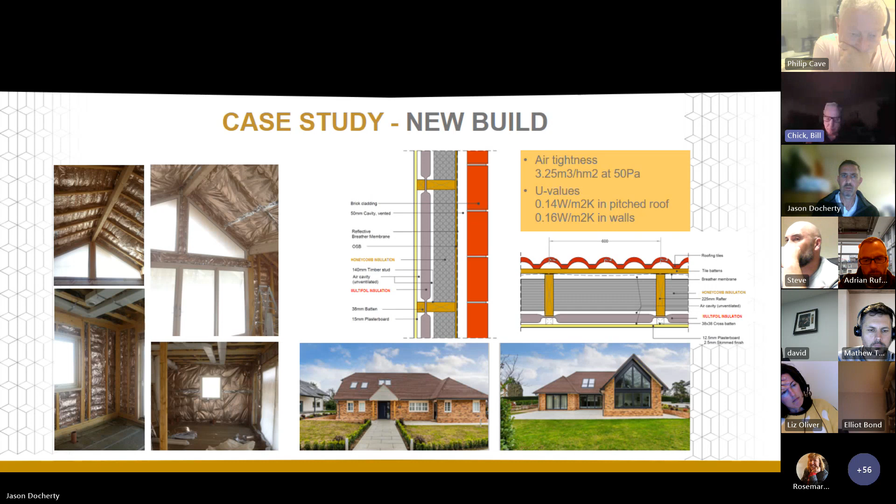On the back of that, we do many, obviously, renovations and conversions, etc. And we've been on George Clarke's quite a lot recently. You may or may not have seen this, but this is one of our clients who achieved 0.19 in his roof and 0.16 in his walls. And as he'd done most of the work himself, he wanted it to be quick, clean, and easy to install. He didn't have to wear any mask or PPE, as there was no dust, and it was easy to cut and fit. Plus, it worked out a lot cheaper than the alternatives.

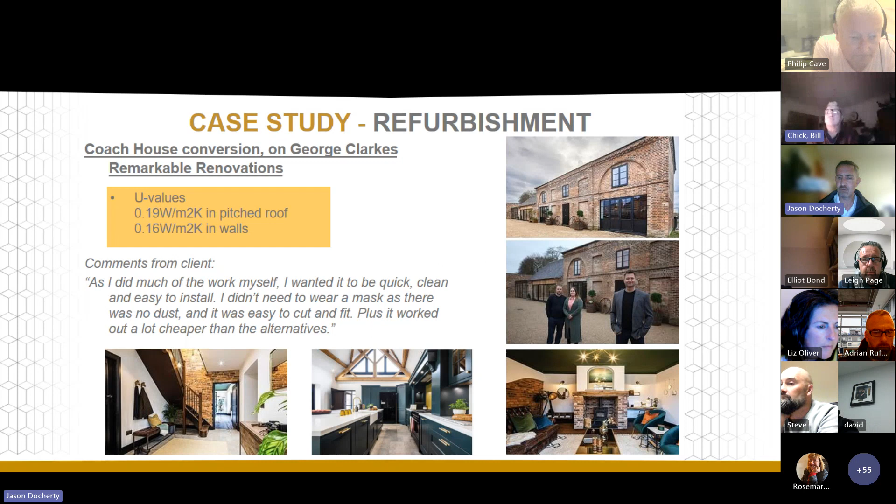So just to recap and conclude on what are the benefits of multi-foil insulation. They provide a continuous insulation over the whole building envelope. They vastly improve air tightness and moisture control. They significantly reduce thermal bridging, especially at the junctions of the dwelling. And they are thin insulation solutions.

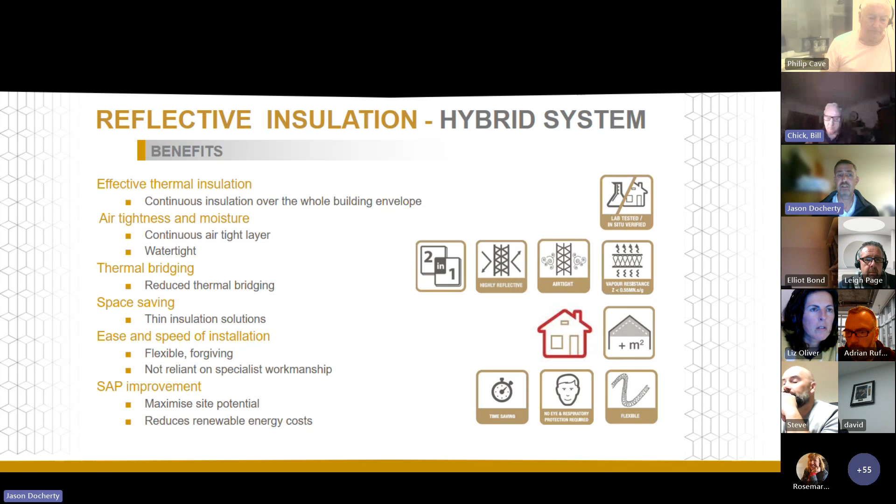Believe me, they're much more flexible and forgiving to use and not so reliant on specialist workmanship. And they can obviously then provide maximum site or SAP improvement, so maximising site potential and potentially reducing renewable energy costs on that site. That's all of the slides for this afternoon. Hopefully you found that of some use.